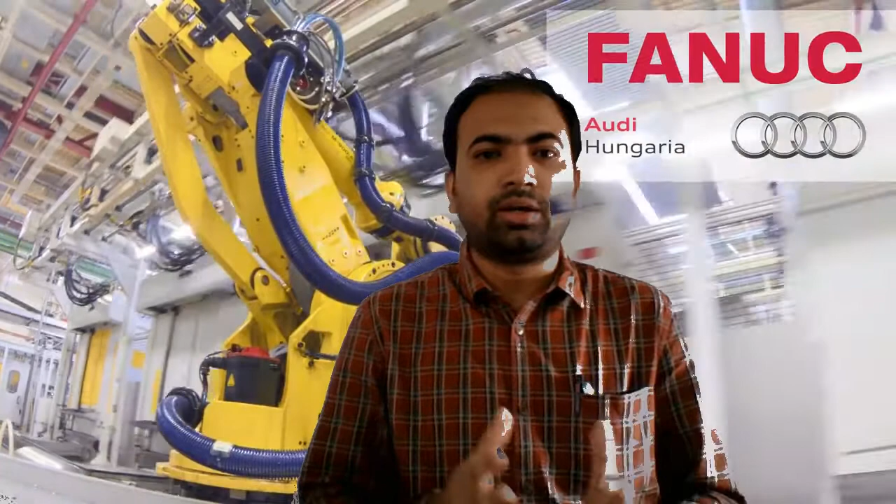Today, I hope all of us are well known about the terms robots and robotics. Before we start, let's think of the origin of these terminologies.

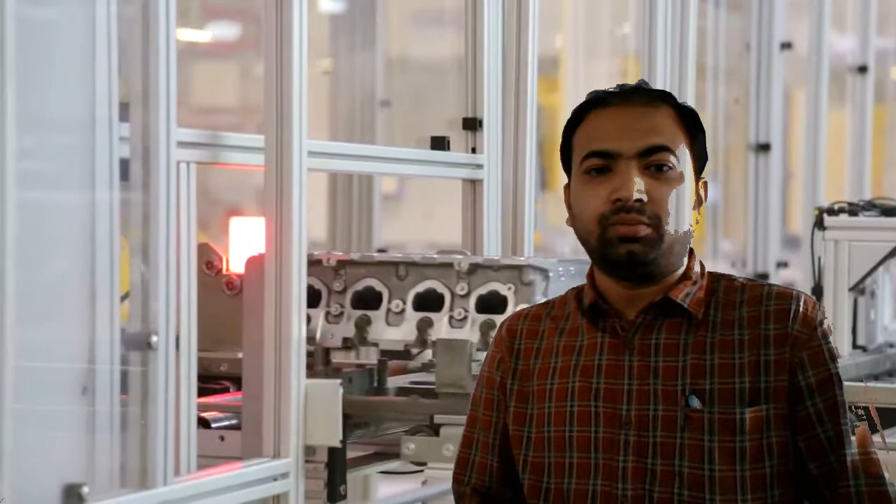I think we all are aware of the greatness of the famous painter Leonardo da Vinci. He was a mastermind artist and inventor, and it's difficult to say which of his endeavors had the greatest impact on modern day art and science. Certainly, his research has shaped current understandings of linear perspective, light, shadow, and human anatomy. He was also famed for his map making, mathematical skills, and geological knowledge.

And yet, some of his most important contributions were not to cartography, architecture, or even painting. Rather, much of Da Vinci's greatest work and influence lies in the world of robotics. Da Vinci's creations span a gamut of robotics, including human-like and animal-like designs. Although many of Da Vinci's designs are incomplete, they were ahead of their time and have since served as inspiration for modern robots in the medical and astronomy fields. Thus, his contribution to robotics cannot be overlooked, dating all the way back to his self-propelled cart and ending with his mechanical lions. He has done a very good job.

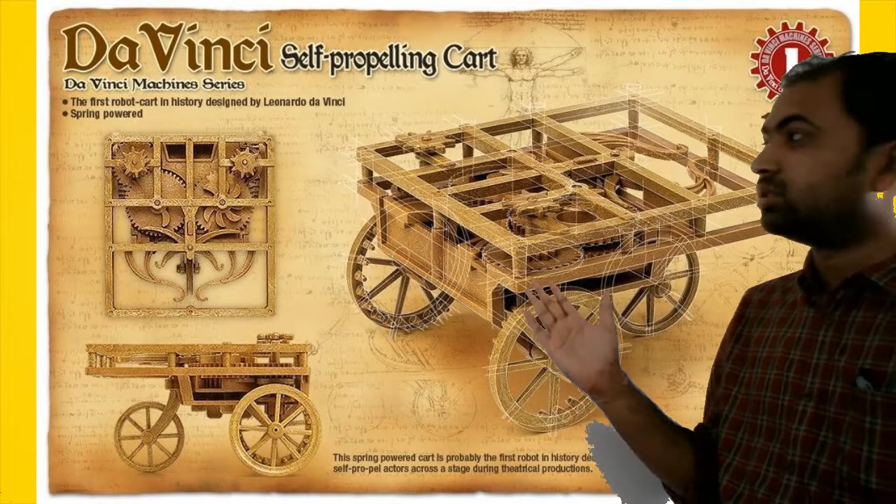You can see the self-propelled cart, which was designed by Leonardo da Vinci. This was designed in 1478. Leonardo's self-propelled cart is widely considered to be the world's first robotic vehicle. It operated via wound-up springs that functioned similar to a clock, and its steering could be programmed via pegs inserted into round holes. These pegs helped guide the cart by making the wheels move at specific times.

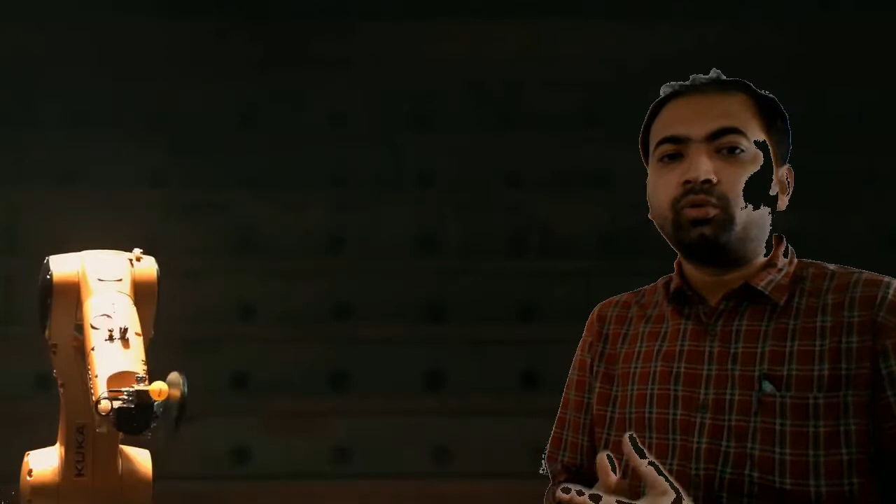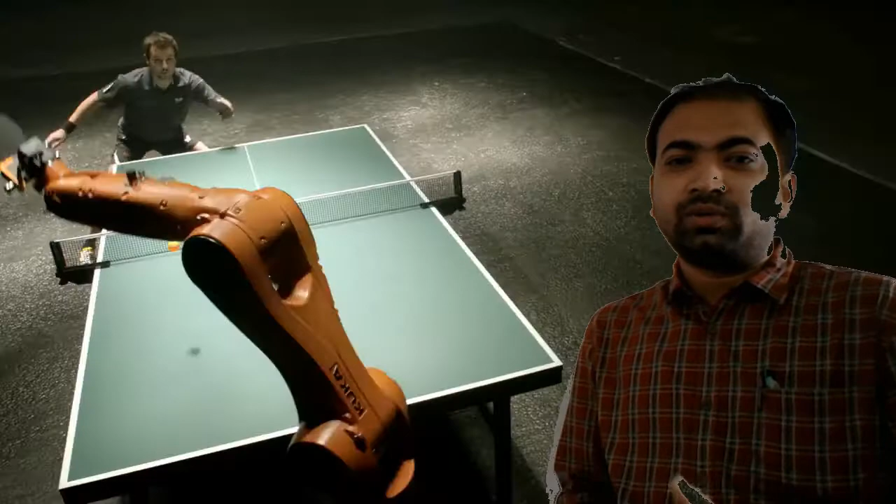Constructed out of five different types of wood, the cart was 5.5 feet long and nearly 5 feet wide, and could theoretically move over 40 yards before needing to be rewound. The drawings of Da Vinci's cart were first uncovered in the early 1900s by historian Girolamo Calvi, who nicknamed the cart Leonardo's Fiat. I hope you all know about the Fiat car. So it was named Leonardo's Fiat.

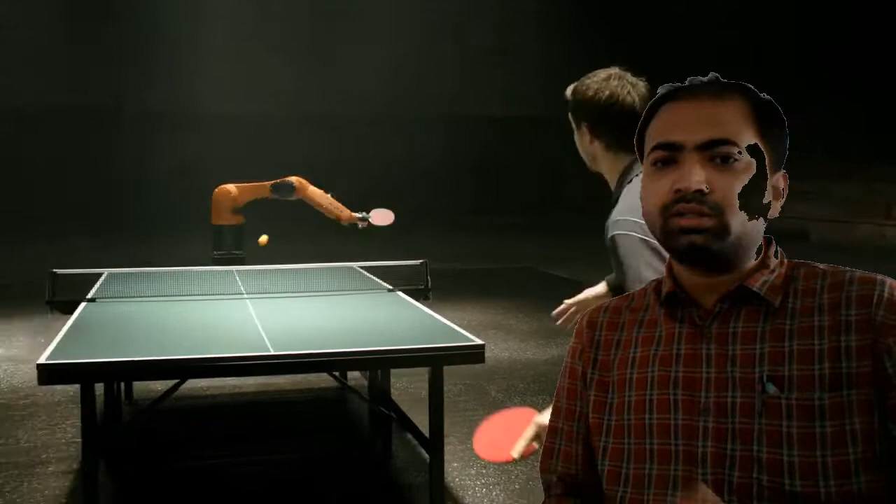For decades, attempts to recreate his design failed and researchers could not understand why. Finally, in 1997, it was discovered that the fault lay not in Da Vinci's design but in researchers' understanding of it. The design's cart springs were intended to regulate the cart's drive mechanism, but researchers had been using them in an attempt to drive the cart itself. In 2004, a working replica of Da Vinci's cart was created in Florence. Due to the cart's potential power and risks, the replica was only one third of the size of the original design. A second working replica was later created in 2009.

Now, records of Da Vinci's Knight, Leonardo's Knight, date to 1495 and it sported Germanic Italian armor. Based on findings from the Codex, which contains the largest compilation of Da Vinci's notes and drawings, it's possible that Da Vinci built a working model of his design later that year. While records can't state for certain, it's believed that the machine was featured in a celebration of one of his patrons. Leonardo's mechanical knight consisted of several gears and pulleys, and according to its design, it should have been capable of moving its arms and legs. Additionally, the knight would have been able to sit and stand.

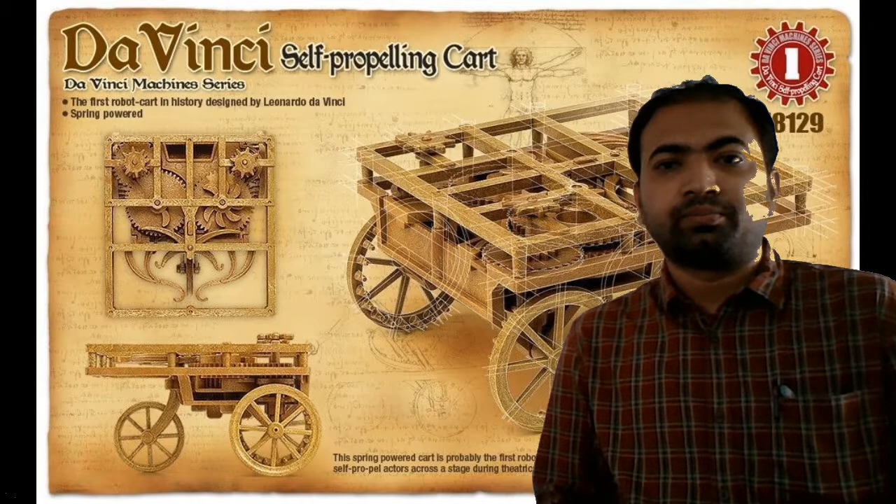In 2002, a modern replica was built by robotics expert Mark Rosheim, and it confirmed these capabilities and more. The robot also had a fully functional jaw and could move its neck and lift its visor. In 2007, researcher Mario crafted a second replica, and it was shown to be just as functional as the first. Largely considered the first humanoid robot ever created, Da Vinci's design would later be utilized by NASA to aid in the construction of planetary exploration robots. Revolutionary for its time, his knight continues to inspire robotics today.

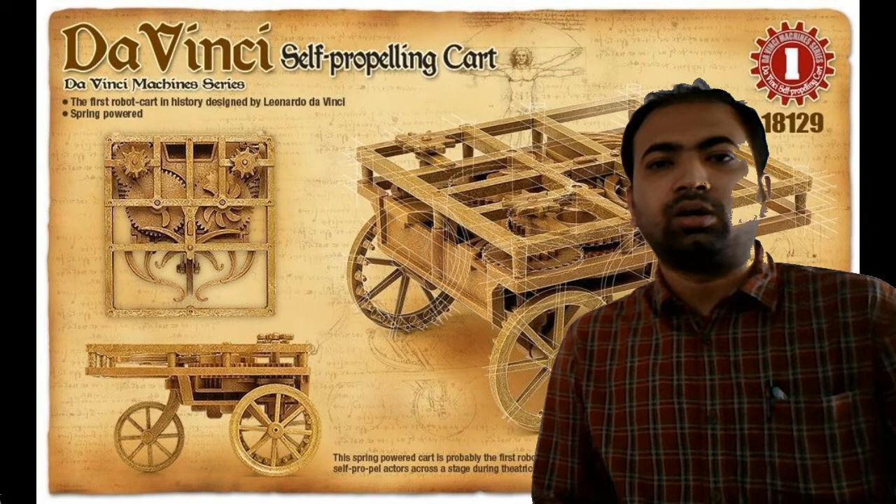Now, next we will come to the early conceptions of robots. One of the first instances of a mechanical device built to regularly carry out a particular physical task occurred around 3000 BC. Egyptian water clocks used human figurines to strike the hour bells. In 400 BC, an architect, the inventor of the pulley and the screw, also invented a wooden pigeon that could fly. Hydraulically operated statues that could speak, gesture, and prophesy were commonly constructed in Hellenic Egypt during the 2nd century BC.

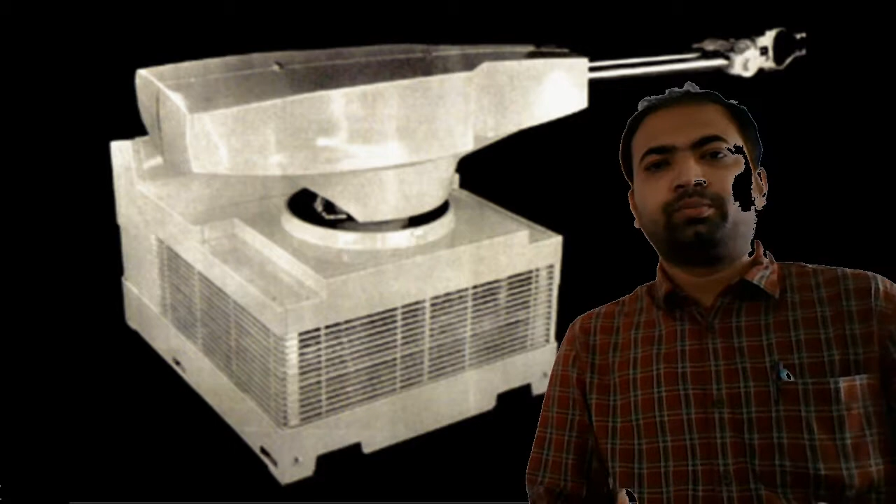Now we'll see the first modern robots. The earliest robots, as we know them, were created in the early 1950s by George C. Devol, an inventor from Louisville. He invented and patented a reprogrammable manipulator called Unimate, from Universal Automation. For the next decade, he attempted to sell his product in the industry but did not succeed. In the late 1960s, businessman and engineer Joseph Engelberger acquired Devol's robot patent and was able to modify it into an industrial robot, forming a company called Unimation to produce and market the robots.

For his efforts and success, Engelberger is known in the industry as the father of robotics. Academia also made much progress in the creation of new robots. In 1966, the Stanford Research Institute led a research team in which Charles Rosen led a research team in developing a robot called Shakey. Shakey was far more advanced than the original Unimate, which was designed for specialized industrial applications. Shakey could wheel around the room, observe the scene with its vision or television eyes, move across unfamiliar surroundings, and to a certain degree respond to its environment. He was given his name because of his wobbly and tottering movements.

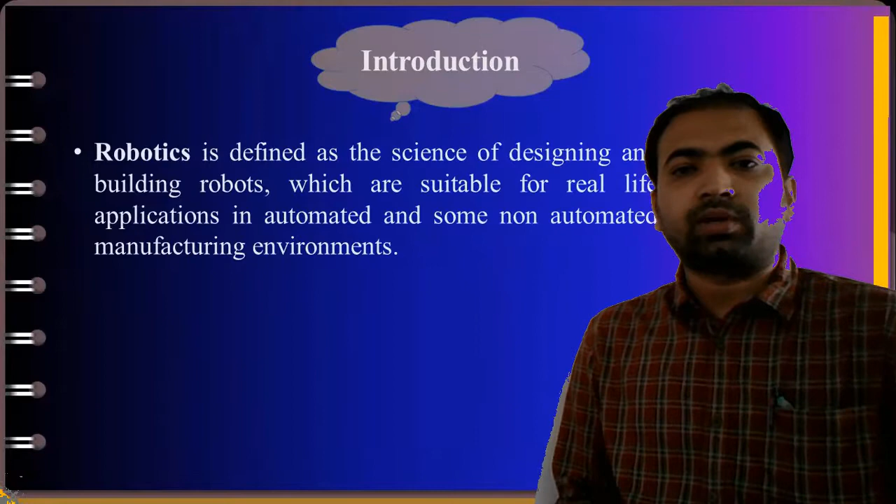The term robotics is defined as the science of designing and building robots which are suitable for real life applications in automated and some non-automated manufacturing environments. It is a branch of engineering that involves the concept of design, manufacturing, and operations of robots. This field overlaps with electronics, computer science, artificial intelligence, mechatronics, etc., as said earlier.

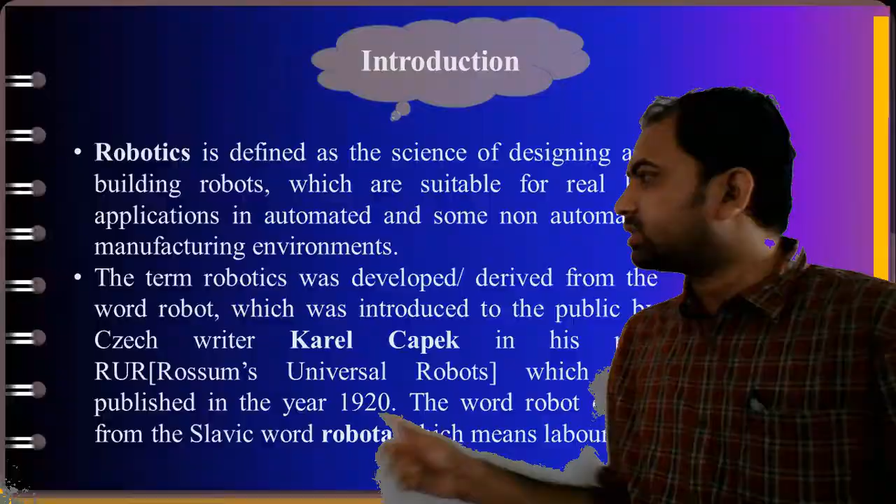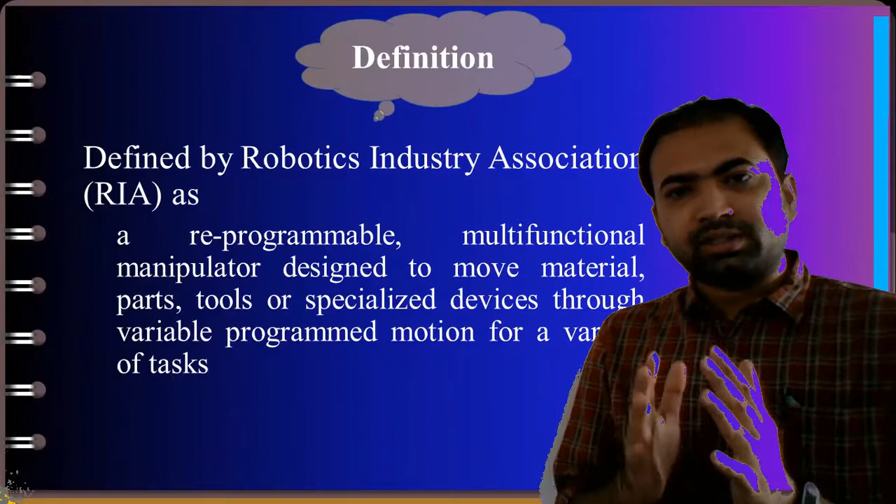Coming to the next slide, the definition. We can say it's a machine resembling a human being and able to replicate certain human movements and functions automatically. According to RIA, known as the Robotics Industry Association, or else the Robot Institute of America, in America, it is a reprogrammable multifunctional manipulator designed to move materials, parts, tools, or specialized devices through variable programmed motion for a variety of tasks. So this is the definition of robotics.

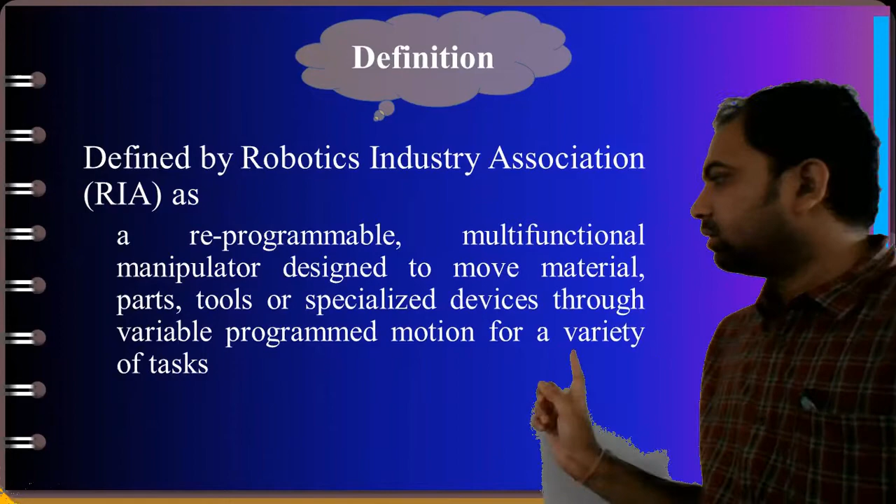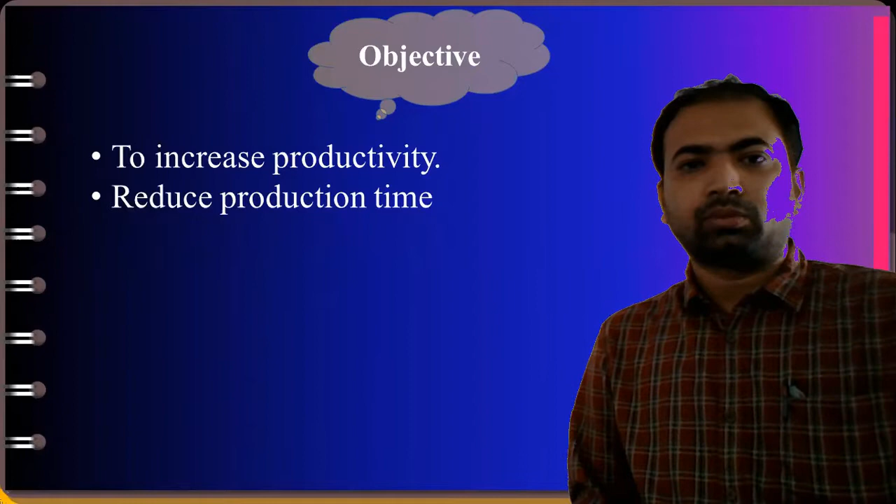Let us move to the objective of robotics, or studying robotics. Number one, to increase productivity. Yes, it helps increase productivity as it supports automation. Number two, it reduces production time. Yes, with human effort, if we do something, we will not be able to maintain the quality, and for some hectic jobs it will take much more time to complete. Next, it minimizes labor requirement, reducing the need for labor.

It reduces the requirement of labor as it can also work like a human being. It doesn't experience fatigue, and it can do flawless work also. That's why it minimizes the requirement of labor.

Next point, it enhances quality of products. That means, generally nowadays we want any product which will have good finishing, or which will be accurate, precise material. So that also it helps.

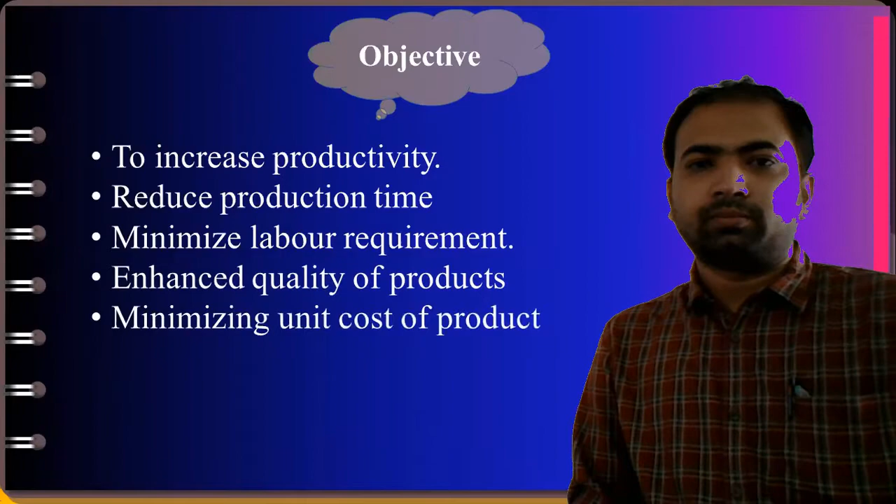Next, coming to minimizing unit cost of product. It helps in minimizing the unit cost, as due to the help of automation, or blessings of automation, we can produce more number of products in less time. That means it helps in reducing the unit cost of product.

Then next, if you are going for pick and place operation, suppose very heavy materials are there, which has to be picked from one place and placed in another place. In that case, human beings can experience some kind of accidents, right? So if we are using robots, it can prevent those accidents, or it will increase safety in the production process.

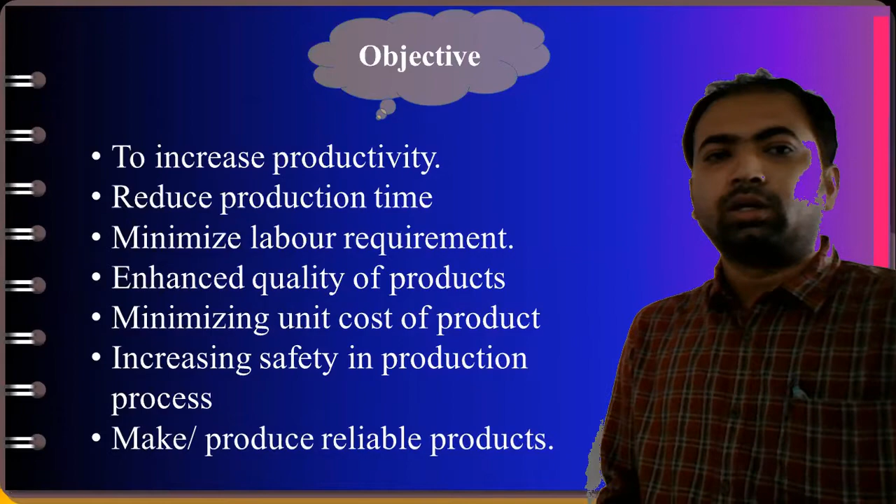Another point is to make or produce reliable products. We all are fond of reliability of anything, like if you purchase a mobile or anything, we always want good reliability of it, right? So this is another reason why we should study robotics.

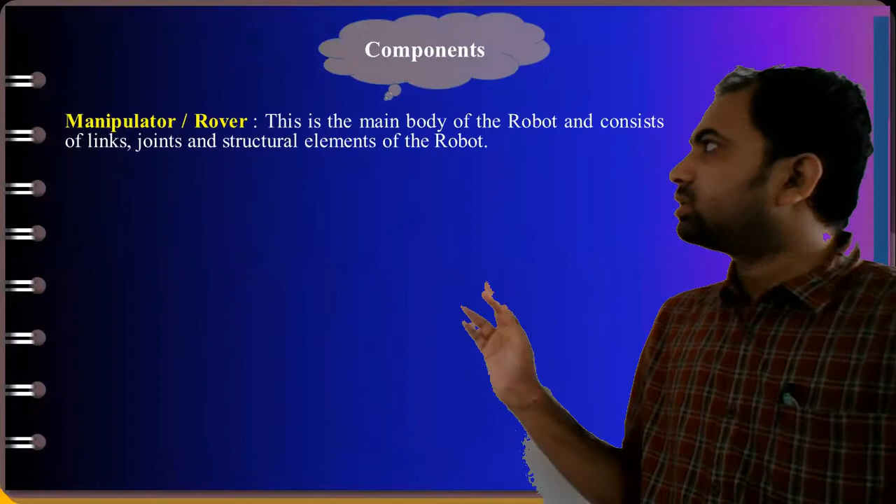Next, components. It has got few components. Number one, we have got the manipulator or rover, which is the skeleton of the robot, or you can say it is the main body of the robot, consisting of links, linkages, joints, structural elements of the robot. Next, we have got the end effector, like our fingers.

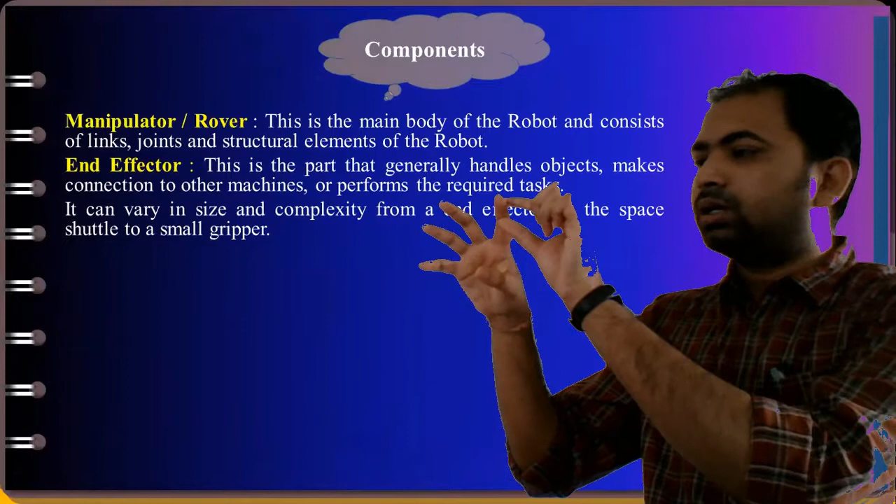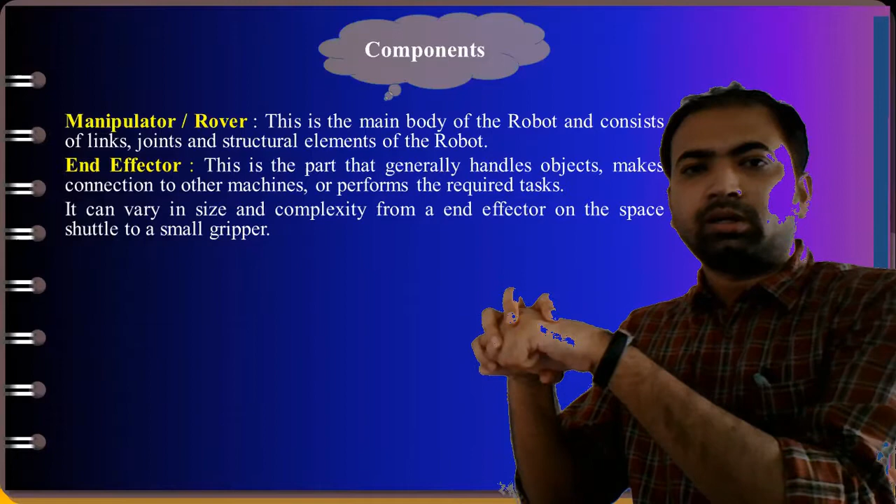If you want to grip something, depending on the type of material, you will apply some force. These fingers or joints have to be bent with a certain degree, and then it will grip it, right? So depending on the work, we will have vacuum cup end effector, mechanical type, pneumatic type - many types of end effectors will be required here.

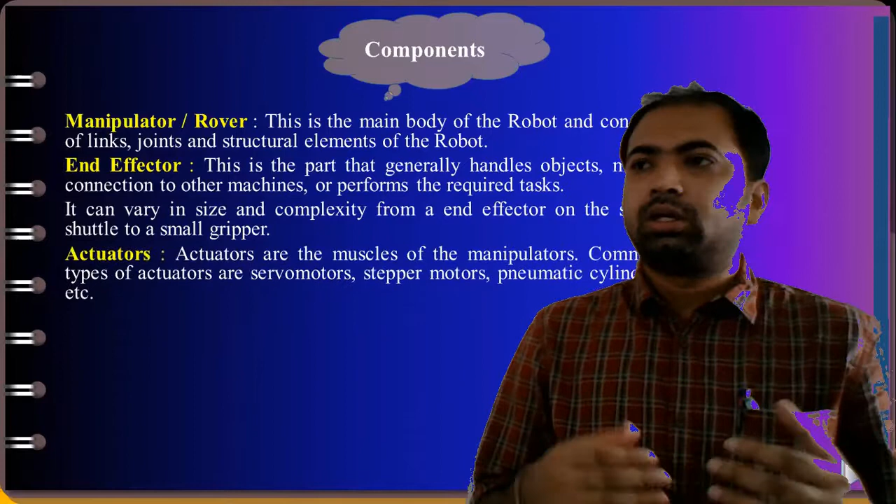Next, actuators. Actuator is like the muscle of the robot. We may have electrical actuator, mechanical actuator, or even pneumatic actuator, depending on our requirement. Generally, electrical actuators like servo motor or stepper motors act as the muscle or actuator of the robot.

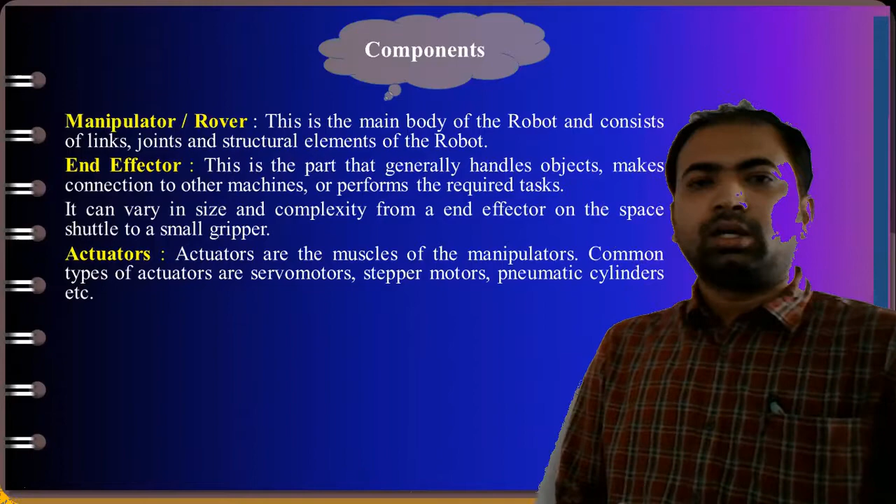Coming to sensors, we all know that we use our eyes for visualizing or looking at anything, and our ears to listen to something. It can also detect the intensity of any speech or sound. Similarly, we use our skin to detect the temperature of any body or sense the existence of any material. So these kinds of things are also required in robots, called sensors. Many kinds of sensors will be used in robots.

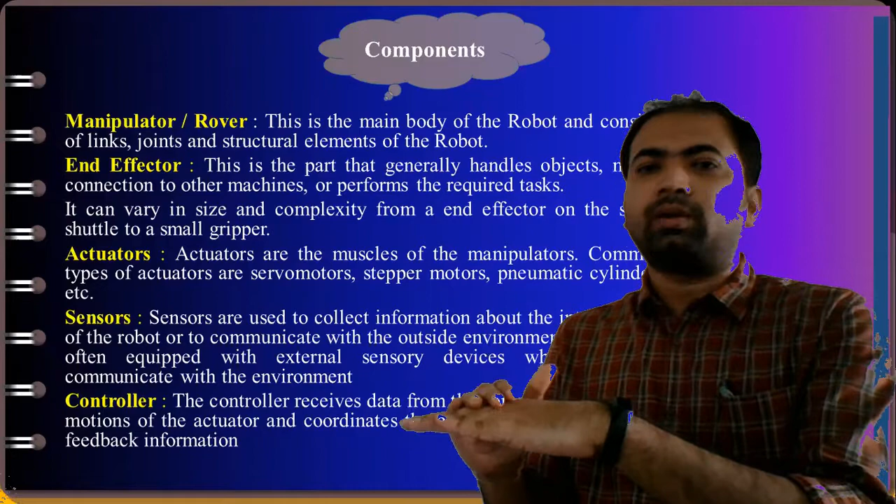Another one is like the brain of the robot, which is called the controller. Like, we have detected some temperature, we have touched some surface, and the temperature is very high. It will immediately give the data to our mind, and our brain will calculate what to do now, then instruct us to remove our hand from that surface, right? So that kind of work is done by the controller, which will receive data from the computer.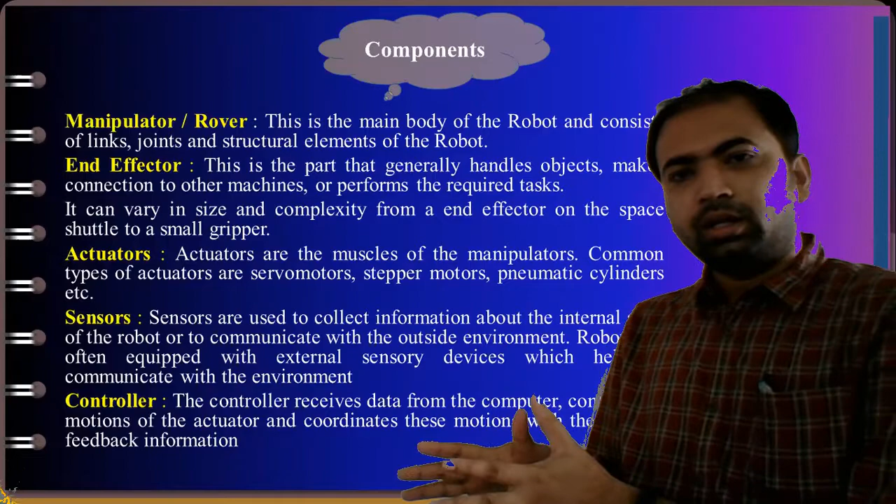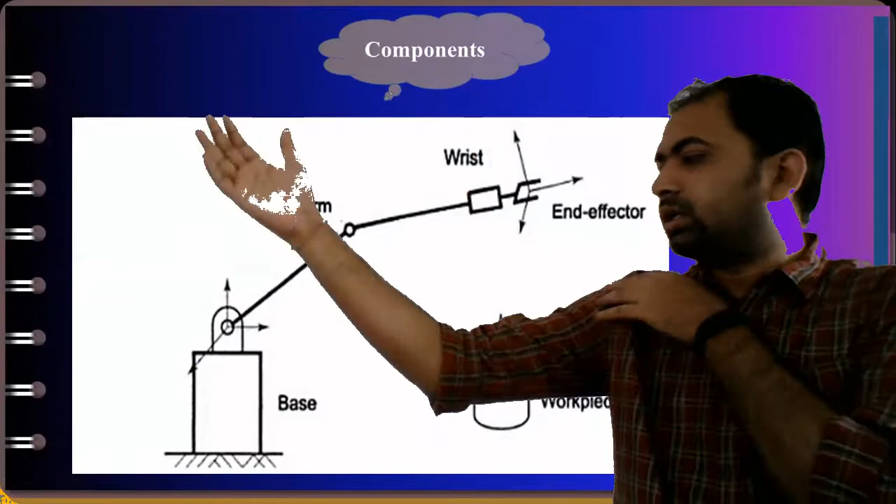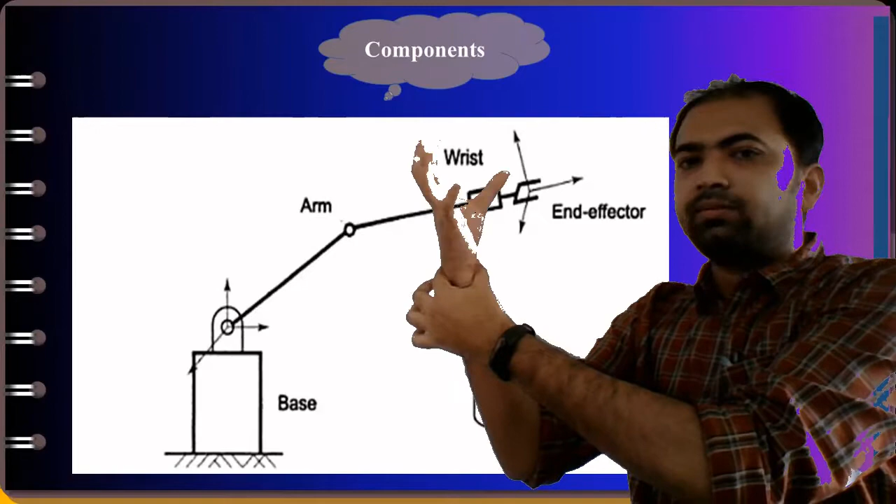In this diagram you can see we have got all the components - the base, which is required and will definitely be grounded in case of a robot. If it's an industrial robot, it requires a base firmly connected with the ground, and with the help of links and linkages - like our arms, this is one link, this is another link - similarly we will have the arm, and then the wrist, which will have many degrees of freedom. And finally the end effector, like our fingers, which works as the end effector. These are the few points we wanted to discuss in today's class.